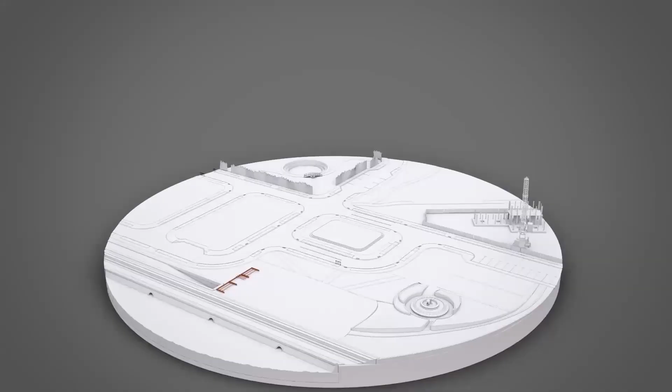Now, I want to talk about the evolution of technology or technology disruption that is shaping the land development and transportation industry, and introduce to you the building information modeling process. Actually, it is not a product. It is also not a service, but it is a process of creating a highly accurate 3D digital model and sharing that information with all the project stakeholders. In the BIM process, you are not just modeling the physical characteristics of the building or structure, but also the functional characteristics of it. So Autodesk software is helping to connect this design evolution to industry.

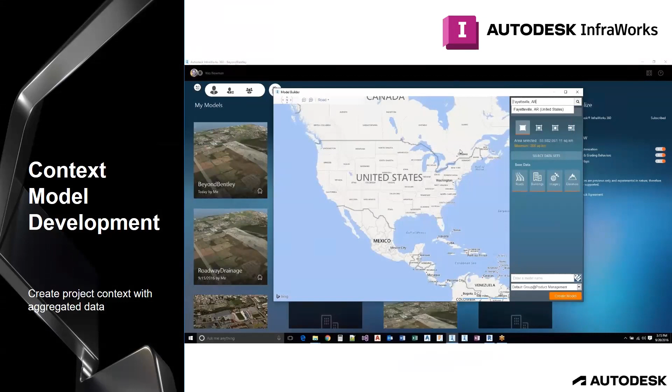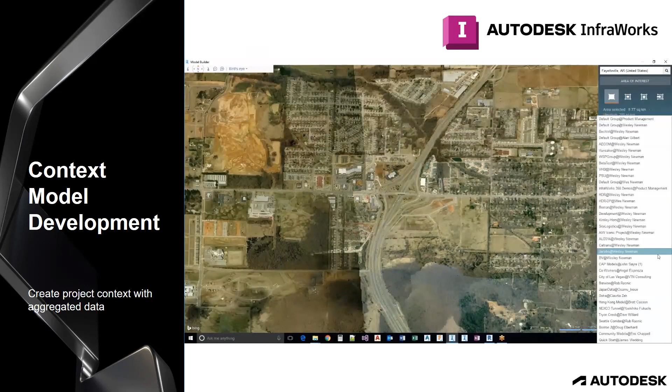Now for Autodesk, the first BIM software is for conceptual design or conceptual planning, which is Autodesk InfraWorks. Now, what is Autodesk InfraWorks? This software is used to design infrastructures in the context of the real world, as you can see in the video. With this software, you can start designing inside of 10 minutes to create a structure or infrastructures. You can also create project context with aggregated data of terrain, aerial photos, and GIS. With the InfraWorks user-friendly environment and direct tools, you can quickly design with the ability to add more detail as needed.

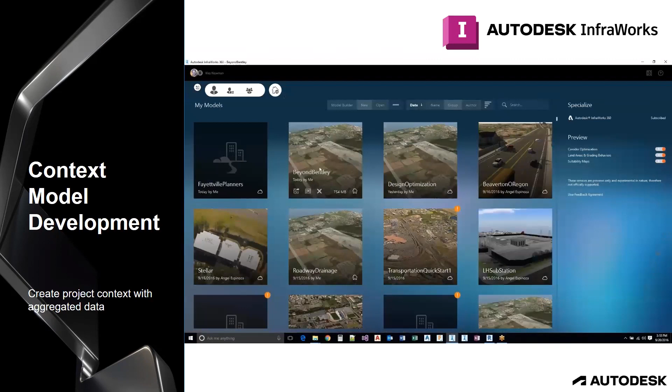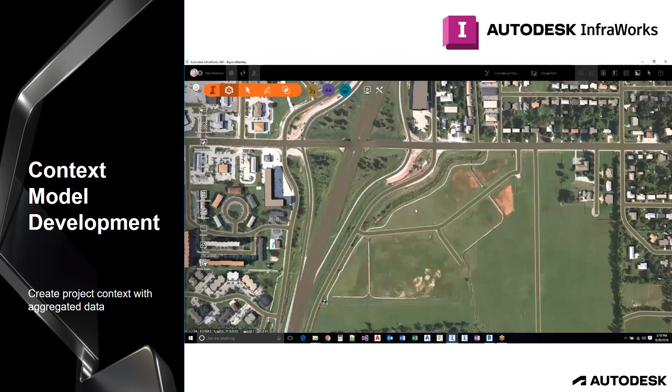For VHB and Rhode Island Department of Transportation, the benefit of model-based workflows is that it allows their highway design team, landscape architects, and visualization artists to collaborate on the model while using multiple software solutions. VHB is an engineering, planning, and design firm in the US that works together with Rhode Island Department of Transportation on some of their projects. They use Autodesk InfraWorks in the early stage of modeling, which helps them make more informed decisions. With InfraWorks, their team created visuals at an extraordinary pace.

Still images of the project's model were also used at multiple public workshops, hosted on their websites, and shown on multiple news outlets. The visuals allowed the project team to clearly and effectively communicate with the owner and the stakeholders about various aspects of the projects, including increased transit options, green space creation, green infrastructures, and more efficient traffic patterns.

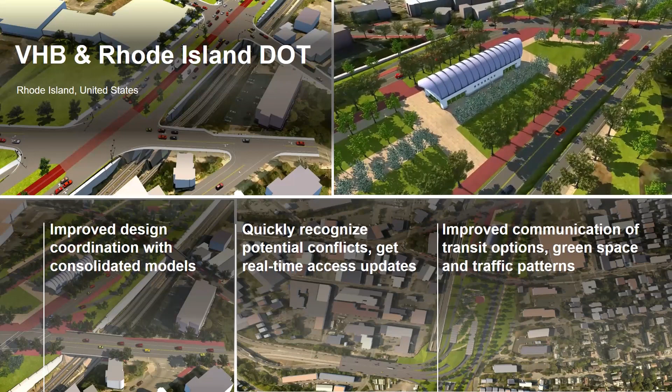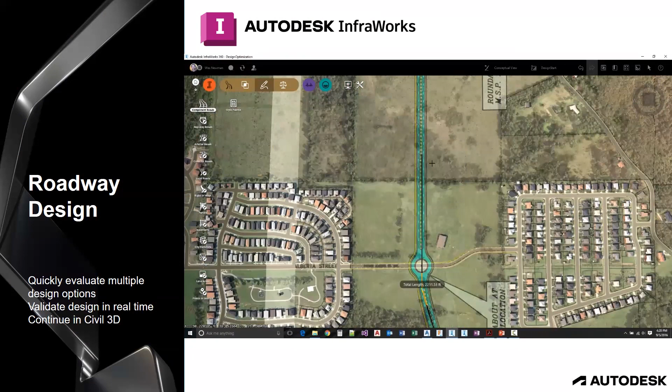In InfraWorks, the roadway design is, I find, quite impressive. You can quickly create and examine multiple design options earlier in the process with its quick geometry layout. You can also create turning lanes and intersections that you can convert directly to roundabouts. You can also add components to your roads, as you can see in the video, and those can be edited quickly. And you can add decorations such as trees that make your visualization pleasing when you present it.

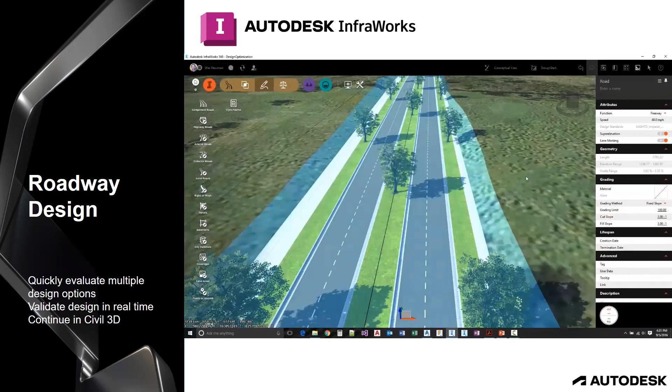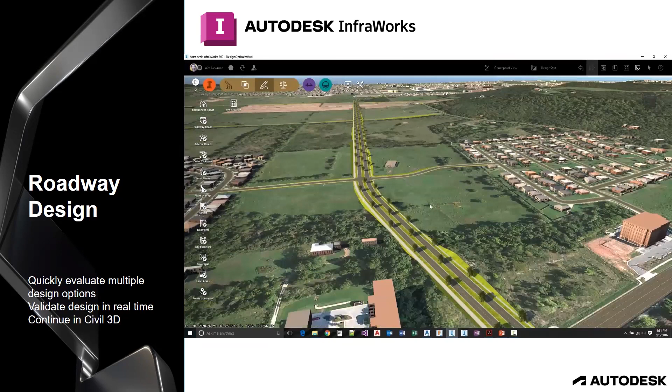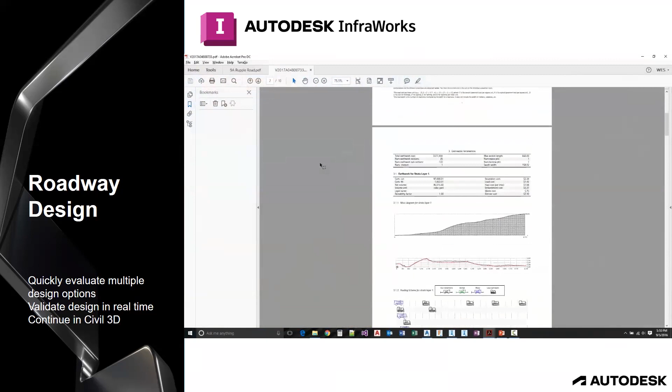With this software you can validate design in real time with a context analysis. In InfraWorks, we also have dynamic quantities: earthwork quantities and materials quantities provided in real time. You can also perform profile optimizations and create reports like this with superelevation reports, which are very important for the conceptual or planning stage.

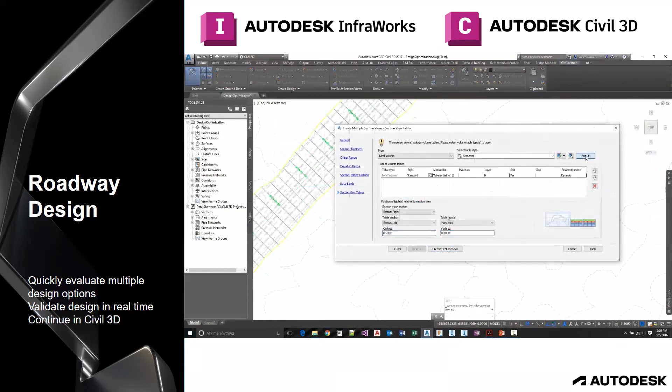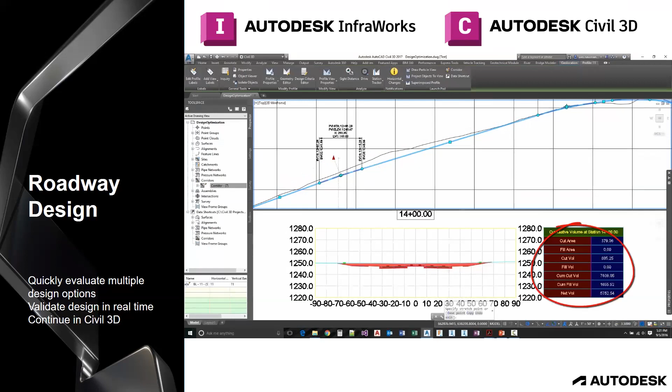And in Autodesk InfraWorks, you can actually export these models or the whole model to Autodesk Civil 3D for you to continue your detailed design and documentation. And once done detailing or editing everything about the roads or intersections that you've created, you can bring the model back to Autodesk InfraWorks. You just have to select reload and then everything will be updated.

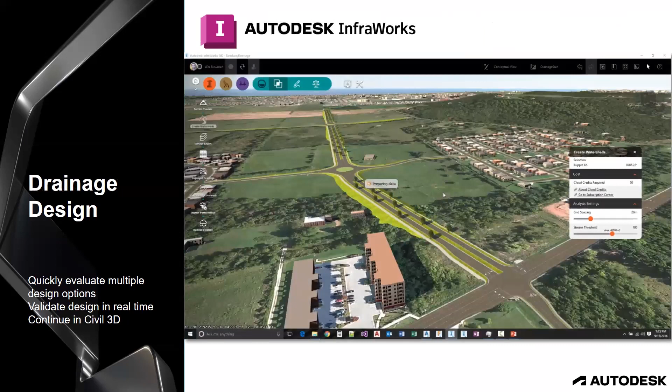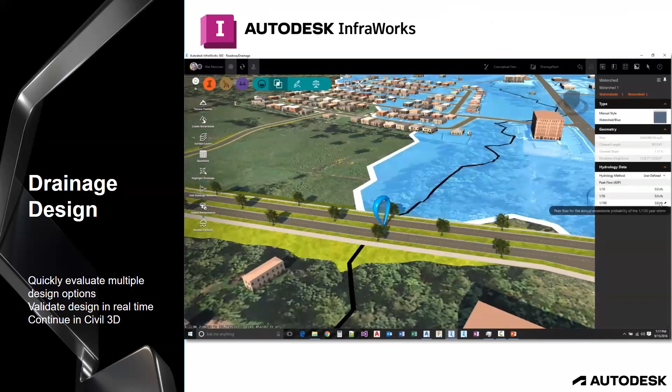Design? The answer is yes. For those who are asking if we can create some piping there for the underground utilities, the answer is yes. Drainage design. Okay, you can quickly evaluate multiple design options also through simplified watershed analysis.

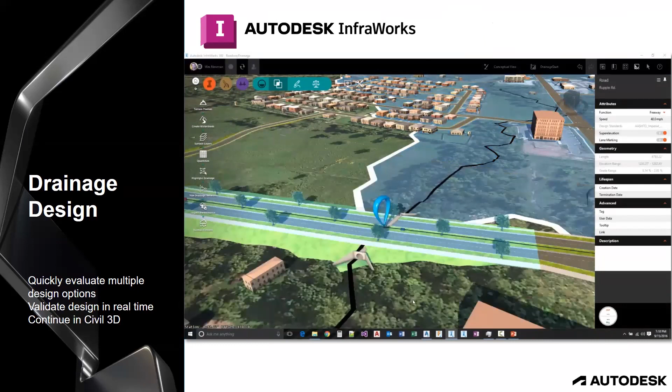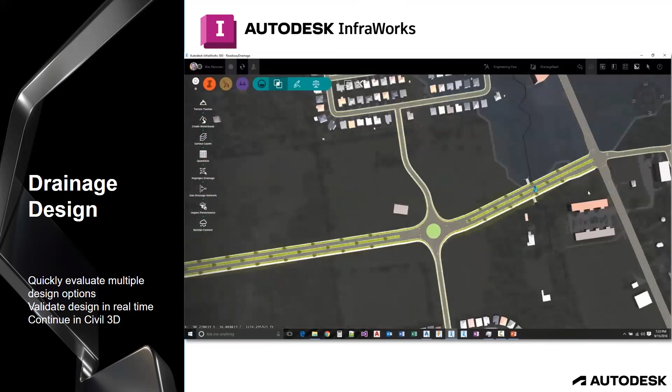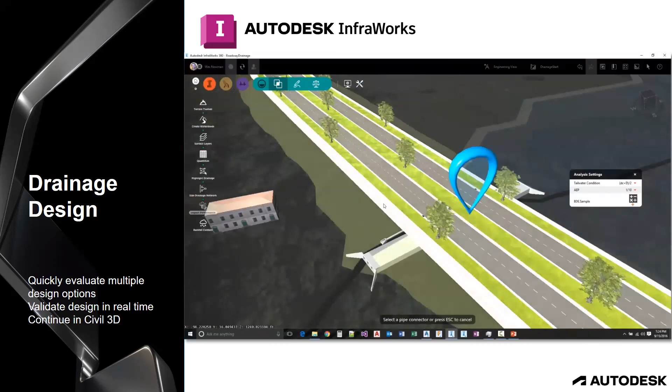InfraWorks also has an automated terrain analysis for generating conceptual watersheds and culverts, as you can see there. Those are automated. You can place them in other parts of the roads if needed. And as you can see, there are some properties that you can also change once you select the culverts.

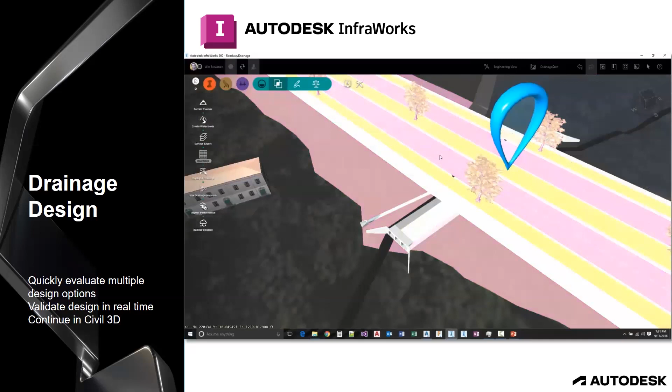And for the placement and sizing of inlets and pipes for closed drainage, you can also edit some properties of it, depending on your requirements, of course. And again, once done creating the plans, or conceptual design of that drainage, you can bring the model to Autodesk Civil 3D too for the detailed design and documentation. So that's how Civil 3D and InfraWorks work.

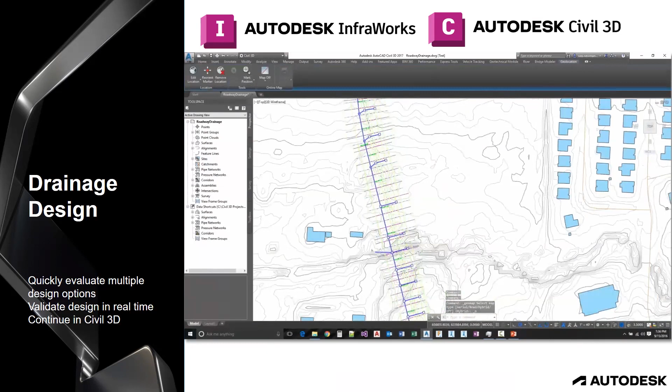Okay. So now let me show you what is Civil 3D. Ma'am, you've actually said it twice in the presentation.

So from Autodesk InfraWorks to Civil 3D, we have this design tool. Okay, what is Autodesk Civil 3D? This is used for analyzing, planning, and designing civil engineering projects. What projects are we talking about? Anything related to roads, bridges, highways, dams, railways, and underground utilities such as pipe networks can be analyzed and designed using Autodesk Civil 3D.

You just have to create the initial design in InfraWorks, but if you need to detail that, you can use Autodesk Civil 3D. This is also a developed AutoCAD software with a specialized toolset for civil engineering works. That's why if you use this software, it has the same environment as AutoCAD. So if you are already an AutoCAD user, you can easily use Civil 3D in your workflows.

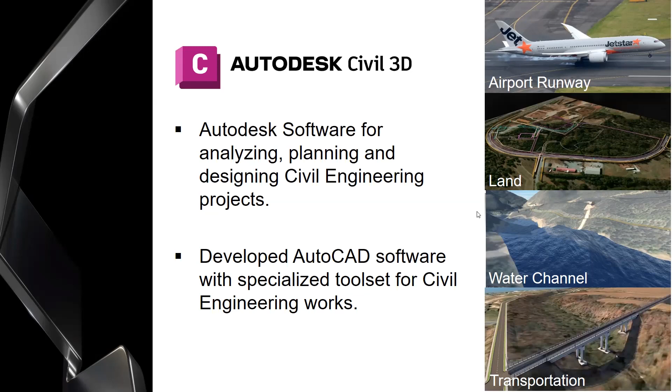So in Civil 3D, you can create conventional surveys. You can leverage high precision survey collection from GPS and total stations to build out existing conditions to begin the design process here in Civil 3D. This is the first step in designing in context.

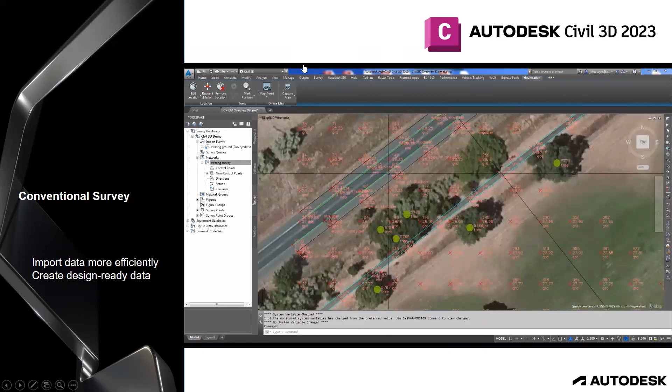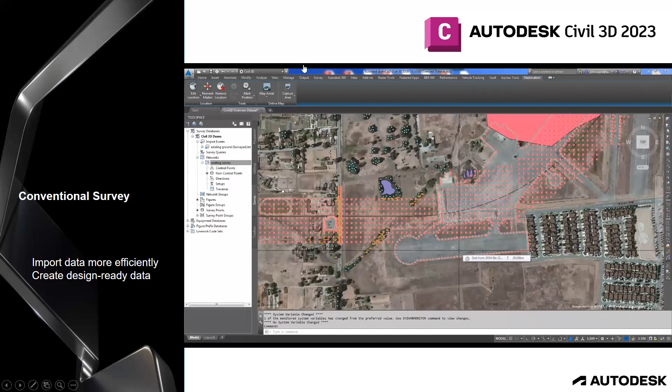Many companies have made the move to BIM. So Civil 3D and the dynamic model provide an associative relationship between the geometry, the corridor model, and the plans, which enables productivity, reduces errors and omissions, and delivers accurate digital data to the field. So for model-based design, using Civil 3D, you can create a dynamic model.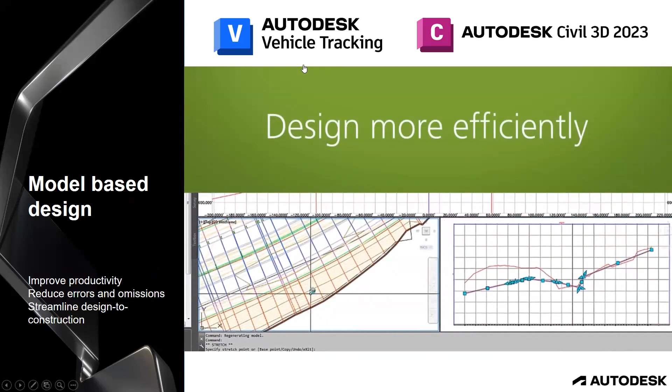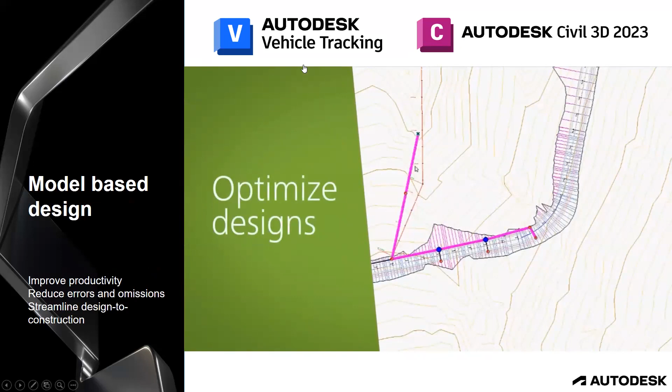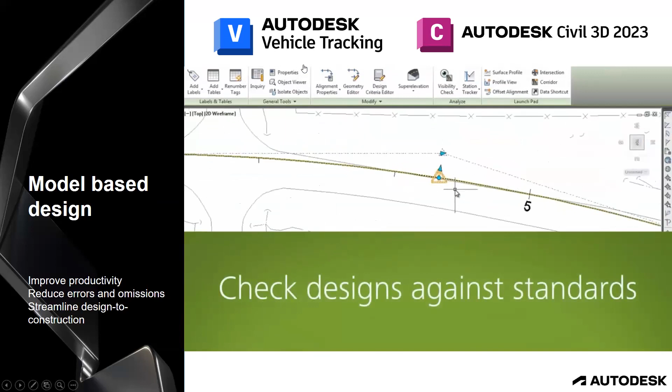You can perform faster design iterations and streamline time-consuming tasks such as geometric layout and intersection designs. And again, these are all dynamic. It also has interoperability with Bentley, Trimble, and Topcon if you want to ask about it.

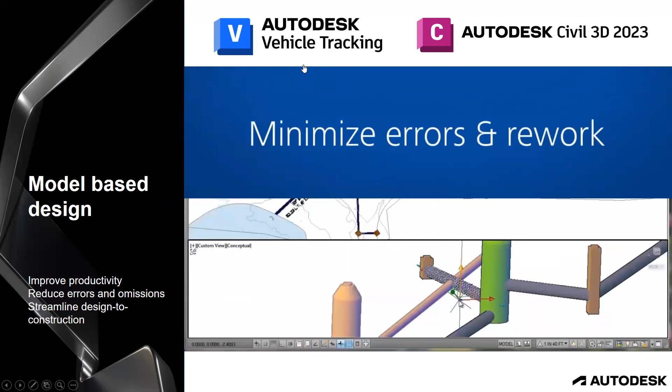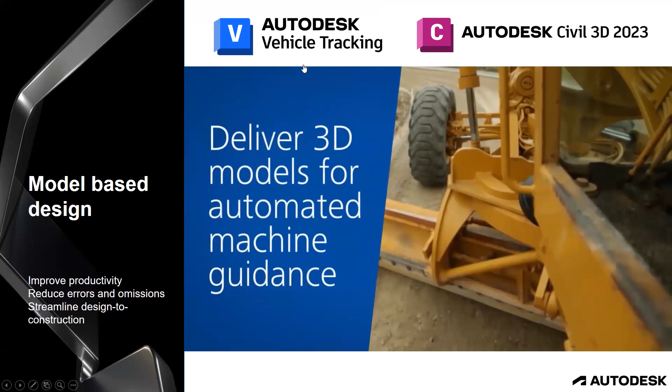So by using the powerful tools of Autodesk Civil 3D, you can reduce errors and omissions. It has associative labeling and annotations, standards checking, drainage analysis, and some clash detection. But again, in Autodesk, we have a specialized tool for clash detection. It's just for creating drainage systems and piping. It also has dynamic reports and quantities. These are all automated. Once you change anything in the model, all of the reports will be updated automatically too.

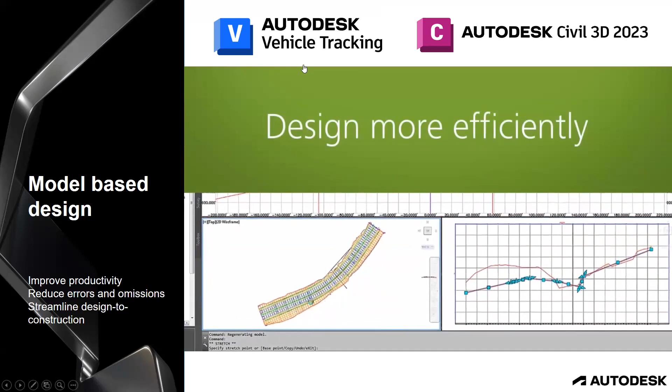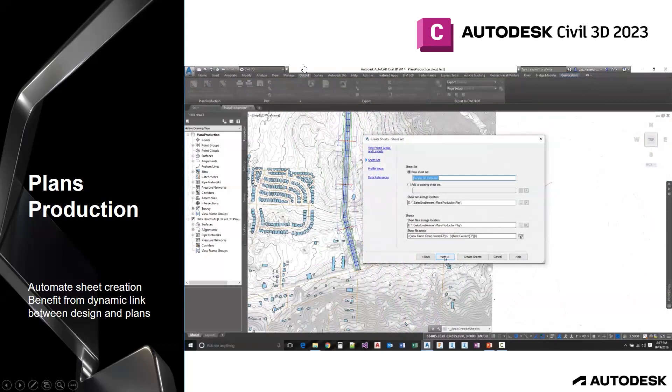So for plans and production, we have automated sheet creation in Civil 3D. You can create plan, profile, and cross-section sheets, and also dynamic view frames and dynamic match lines, which are all important in producing plans. There is also a dynamic link between design and plans. When you label sheets, they are all dynamic.

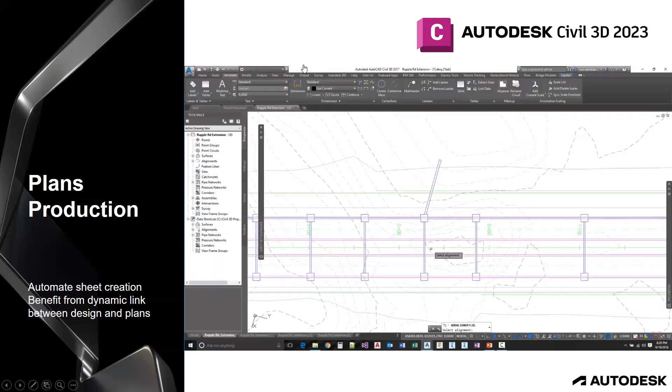One witness of how powerful Civil 3D is, is the Washington State Department of Transportation, or WSDOT, and the Clark County Public Works Department. Who are they? The Salmon Creek Interchange project is a joint effort of these two organizations, and one of the biggest public works projects in Clark County history.

The project includes the construction of a new interchange between Interstate 5 and 205 in Southwest Washington, as well as other improvements to ramps and local roads. Clark County was responsible for the design and construction of all the elements needed on both sides to facilitate the new interchange under the design of WSDOT.

So County uses Autodesk Civil 3D to design the corridor model to more easily adjust the center lines, the profiles, the curves, and also the ramps. The 3D infrastructure model helps keep all the utilities, the proposed drainage system, the corridor designs, and the associated documentation in sync with each other at all times to minimize design conflicts and improve quality. It also helps construction crews better visualize the design to expedite construction easily.

Now let's go through some interoperability of Autodesk Civil 3D and Infraworks with other Autodesk software. I'll be tackling three of these: Autodesk ReCap Pro, Autodesk Inventor, and Autodesk Navisworks Manage. These softwares are all inside the AEC Collection, a group of Autodesk software containing these tools and more. So with one license, you'll have access to these tools. Just email us for the quotation.

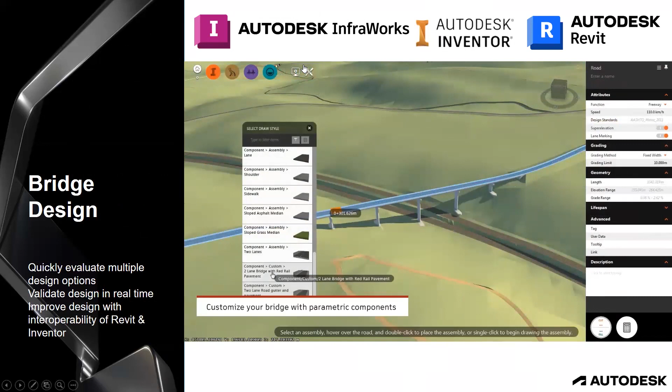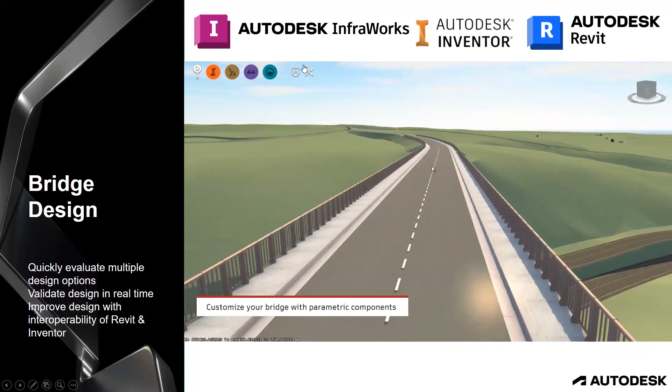The enhanced interoperability brings Revit and Infraworks together to perform more efficient parametric bridge design. In Infraworks, you can create a dynamic and intuitive layout of a bridge, as you can see here. You can also automate design of components such as the superstructures and substructures - girders, piers, foundations. Bridge components understand how they relate to one another, so they are dynamic. If you change something from the foundations or the pier, everything will be updated.

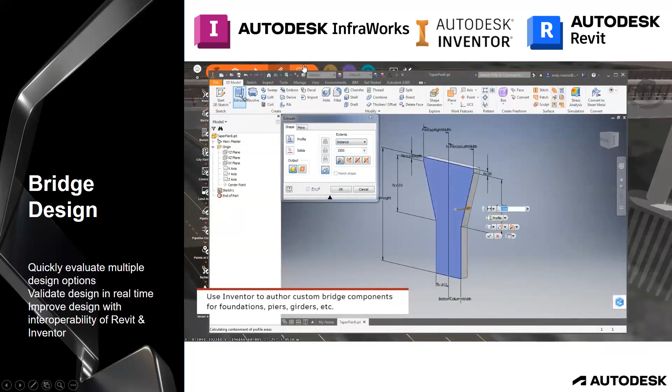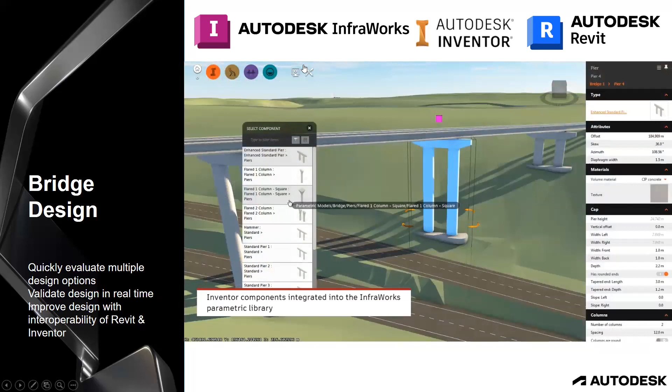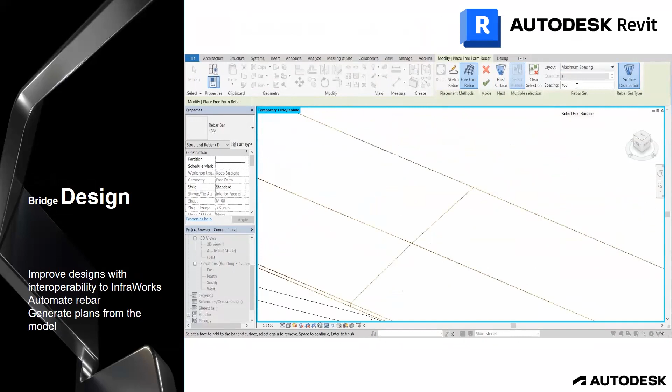Aside from Civil 3D and Infraworks, you can use this software for reinforcement and rebar placement. By using some of the modeling tools of Revit, you can do downstream interoperability from Infraworks for reinforcement, detailing, and documentation. You can place rebar into non-linear shapes, as you can see, and create more accurate, detailed documentation of the concrete bridges and structures.

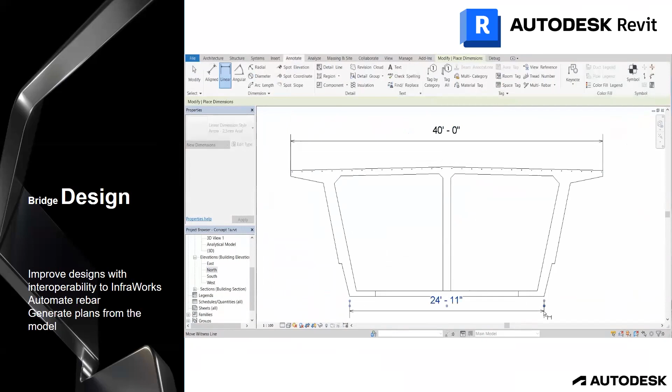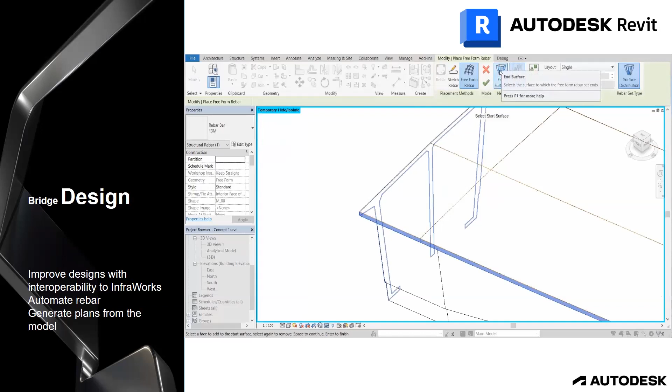Elements are direct representations of information from the Revit models. So this is how powerful Autodesk softwares are when it comes to creating infrastructure designs, specifically when you need to create bridge designs. If you need to detail all of the vertical structures and add rebars, you can bring the model directly to Revit.

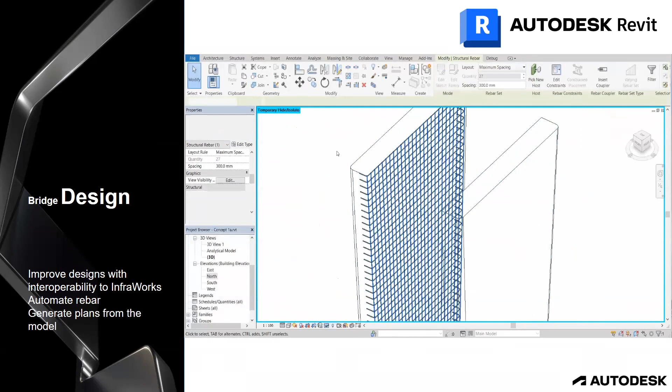So Mortenson and Wisconsin DOT used this kind of workflow in the Mitchell Interchange design. Are you familiar with that? It's a north-south freeway project that includes updating 35 miles of I-94 from the Illinois state line through the Mitchell Interchange. The goal is to help improve safety, reduce congestion, and modernize almost 35 miles of this transportation corridor from Milwaukee to the Illinois border. To summarize, the improvements include one additional lane in each direction, safer mainline, ramp, and frontage roads, and modernized roadways.

So what the Department of Transportation did with multiple design plans was convert their designs from 2D to 3D models so they could be linked to construction. The team at Mortenson, working with the owner, used Autodesk tools along with design tools from Bentley - Inroads and MicroStation. Maybe some of you know about those two softwares from Bentley. Civil 3D was used along with Inroads for the surfaces.

But when it comes to structures, you can use Revit. Civil 3D was used along with MicroStation for the site and utilities, and Revit was used for the structures design, specifically bridges.

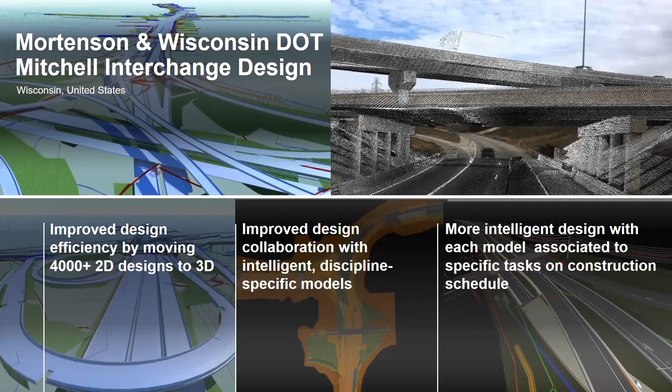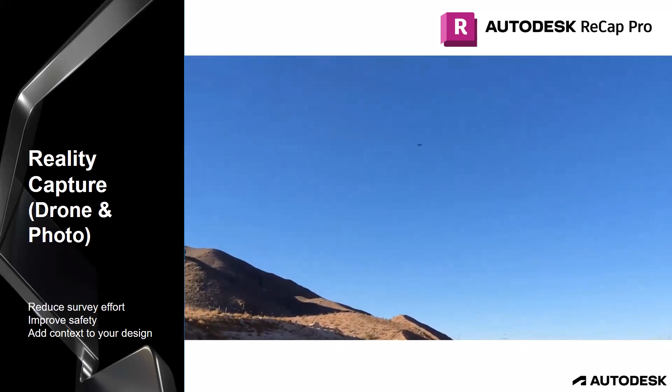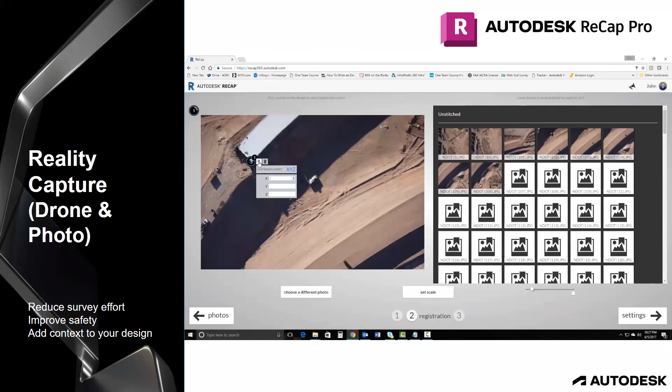Now, another software that you can have interoperability with Infraworks and Civil 3D is Autodesk ReCap Pro. This software allows us to use drones and laser scanners to scan the existing conditions of a site or ground, and then convert it into a digital model, as you can see here in our video. You can use this as your base plan to start your model with.

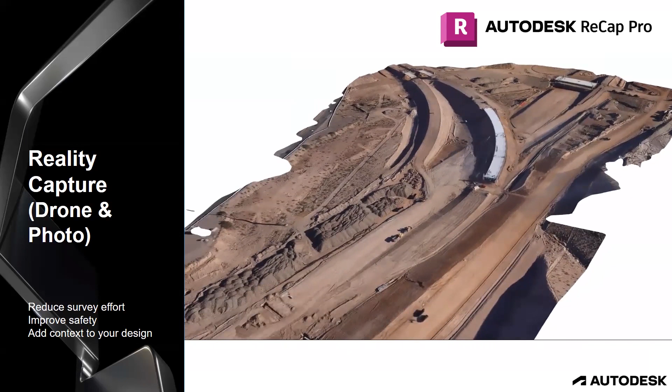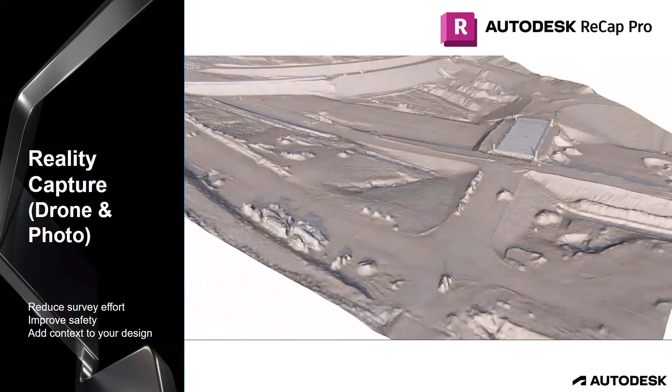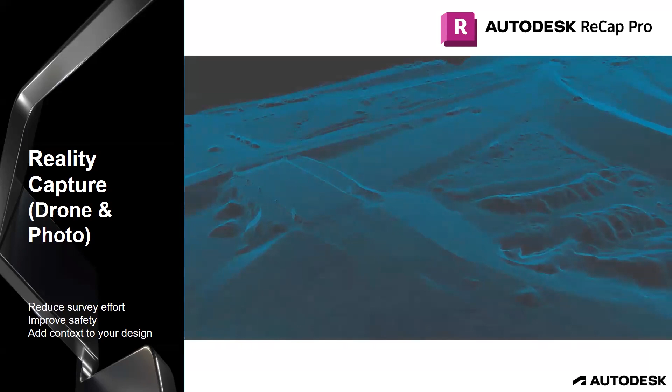By importing this data into Autodesk Infraworks, you can reduce the time required to survey the site, which minimizes the size of your survey crew. You can also improve safety with new methods of data collection, and add context to your design in a one-stop shop to manage your data in Infraworks. So this is cloud-based processing when you use ReCap Pro going into Infraworks.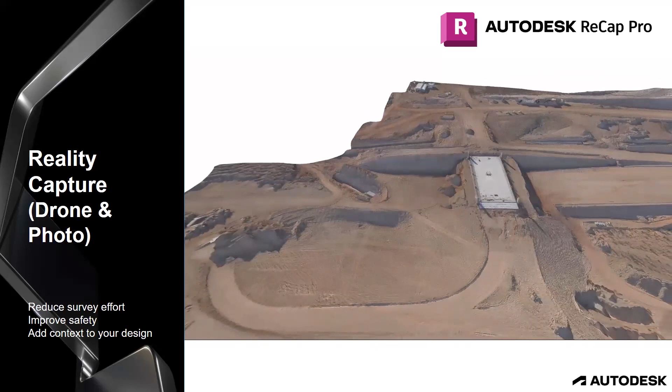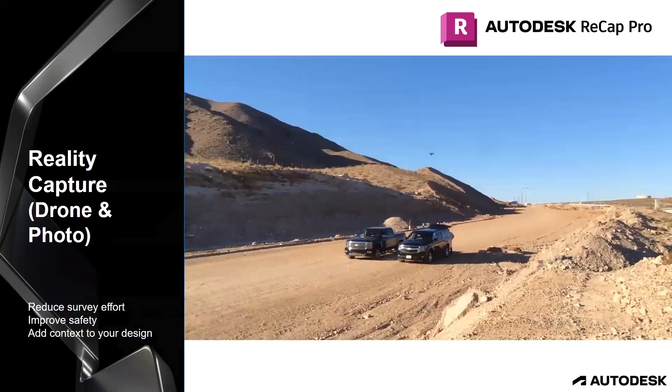Imagine this kind of workflow in your model. Autodesk has created a powerful and easy to use workflow for reality capture in order to bring you a scan to BIM workflow. So actually, each of you can use drones and laser scanners to capture the existing conditions of a site.

Autodesk has partnerships with every major hardware vendor, including UAV drone manufacturers and laser scanner manufacturers. Recap Pro has been designed for use by someone with no previous Autodesk skills or experience. It is very user-friendly, with one-click automated workflows that do powerful tasks like scan registration, which stitches multiple scans together into one point cloud, and intelligent cleanup services.

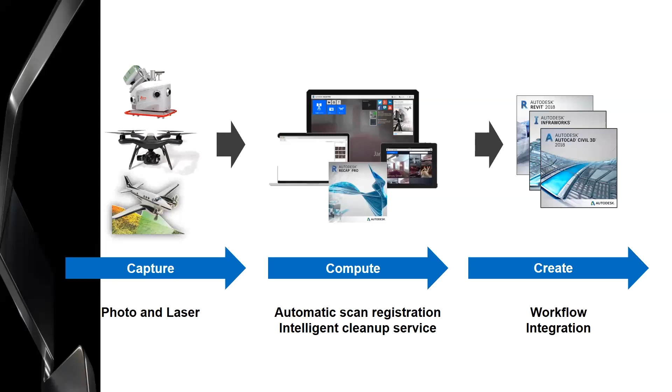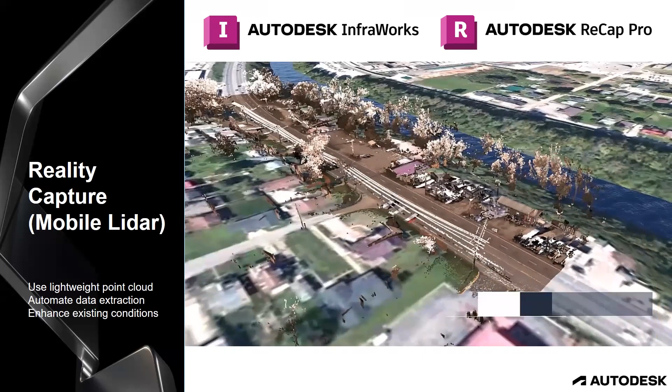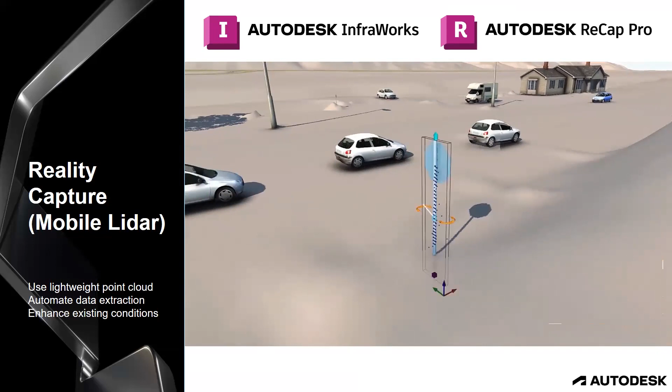This is great if you need to start creating your design, specifically road designs or site development plans. This one is Autodesk Recap Pro plus Autodesk Infraworks. The model or site was created in Infraworks, and you can bring the point clouds into Civil 3D to automate data extraction, such as bare earth terrain, vertical point features such as poles, and linear features. You can also use linear features to existing surfaces.

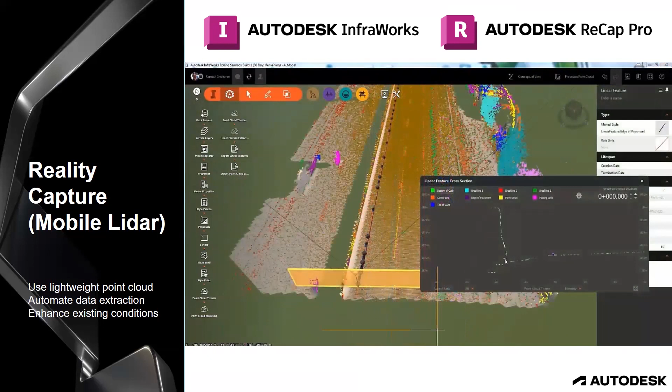And they are all lightweight point clouds. That one is a linear extraction, so you can reduce errors if you need to export the data of this point cloud to Civil 3D.

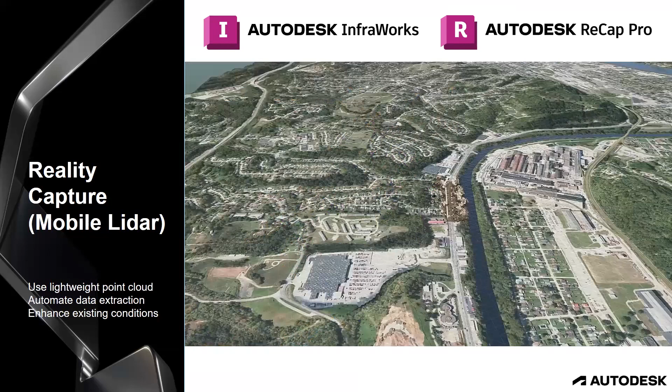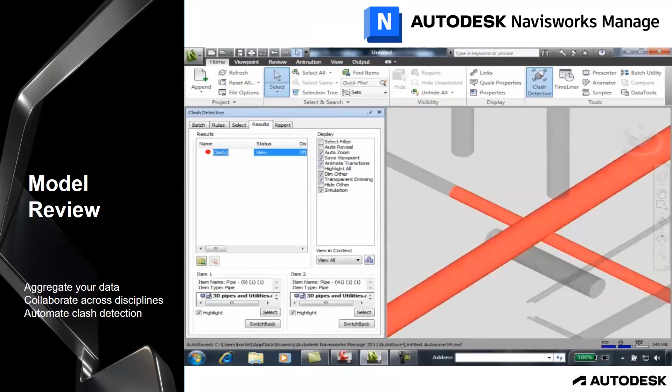In model review, clashes are unavoidable. Autodesk has a platform for you to put every design discipline into a single model and perform clash detection. The Autodesk software is called Autodesk Navisworks. This software allows us to aggregate over 50 file types from all major software vendors. It can support DWG files,

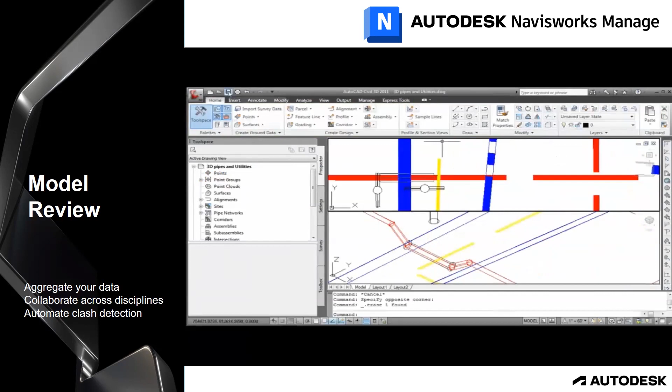Revit files, SketchUp files, and more. You can also create interdisciplinary coordination in Navisworks and perform constructability review, such as clash detection with reports. This results in reduced errors and omissions.

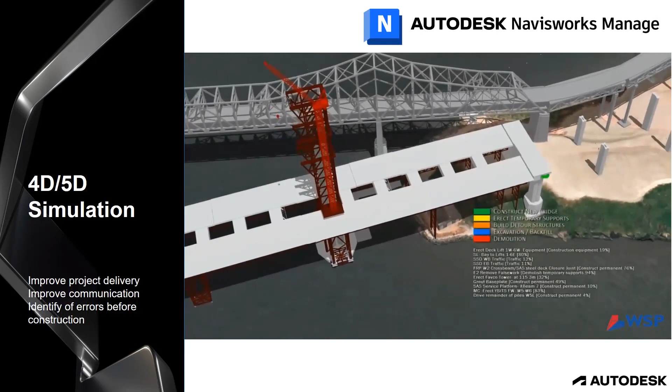In Autodesk Navisworks, once you are done creating your model in Infraworks and detailing that into Civil 3D, you can bring that model into Navisworks. Navisworks also has 4D modeling that allows stakeholders and leads to visualize construction over the project duration, for you to identify potential spatial conflicts and schedules.

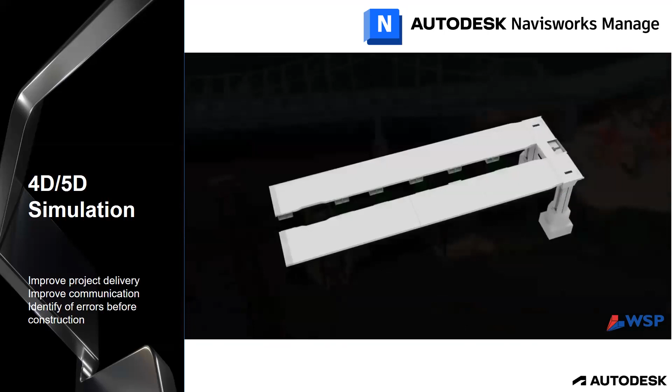By adding a cost component, you can add cost to each day-by-day task. It can also process and create a fifth dimension, a 5D model, because such 5D engineered models allow stakeholders to evaluate cost and model cash flows for each phase of the construction.

So imagine this kind of visualization when you are on site, looking at your phone and seeing this kind of video. You just pause, and then check on site whether the project is advanced or delayed. This is so powerful when it comes to model review or project review.

So to summarize everything that I've shown you, these are the Autodesk infrastructure solutions. First, for survey, planning, and concept design, you can use Autodesk Infraworks, Recap Pro, and 3ds Max. I didn't discuss 3ds Max, but this one is used for rendering if you need to create a hyper-realistic rendering.

But for detailed design and visualization, you can use Civil 3D, Revit, AutoCAD with specialized toolsets, and we also have vehicle tracking. Vehicle tracking is an add-in for Civil 3D that you can use for analysis of the vehicle, if it can pass through intersections or roundabouts, something like that. For virtual design and construction, you can also use Autodesk Recap Pro and Navisworks Manage. All of these things are in the Autodesk AEC collection.

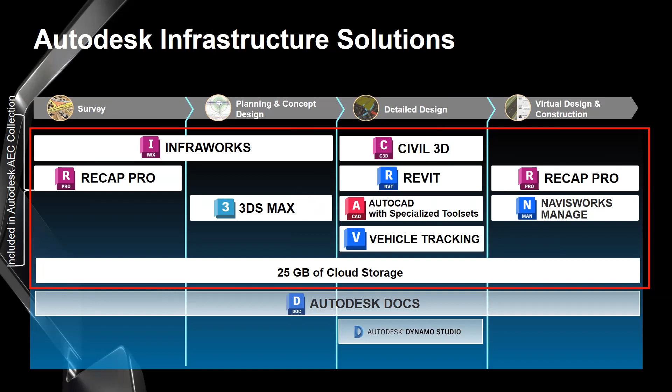What about the benefits of these softwares in the business? If you have AEC in your workflow, you can win new work. You can meet client demands for BIM deliverables. You can also participate in alternative project delivery, and effectively communicate design intent to earn stakeholders' buy-in. That is the competitive advantage of it.

You can also deliver higher quality designs because of this AEC collection and the workflows inside it, improving building performance via analysis tools. You can also use visualizations and VR to experience your design before it's built. And you can work more efficiently, reducing errors and change orders, and expand billable services by using these workflow solutions.